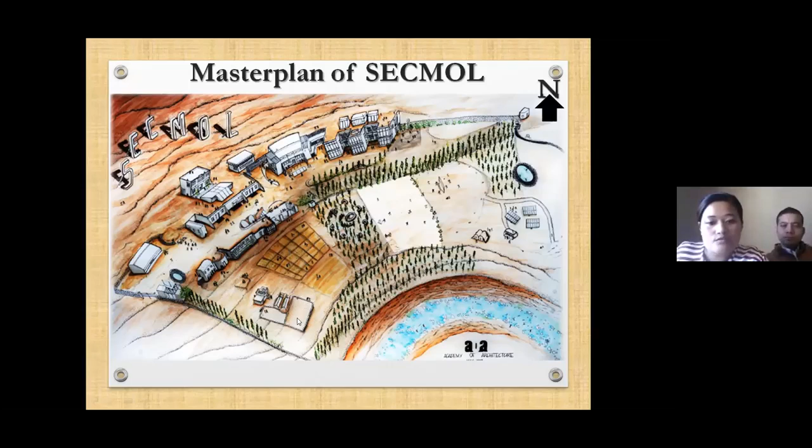These are the Timken Hall with big kitchen area, and these are some kind of organic farms, and these are the outdoor learning spaces surrounded with green areas, and these are the cow sheds and greenhouse for farming. So this is the southeast aerial view of the SECMOL, and this is the southwest aerial view of the SECMOL. Now let's move through each block in detail.

So this is the main block, Terra building, which is being constructed with rammed earth and passive solar technique. This building has won the Terra Award for Sustainable Architecture in 2016. Here we can see some modifications in Ladakhi architecture as per modern demand. For example, we can see this solarium space with provision of corner windows, which helps for maximum solar heat gain during daytime.

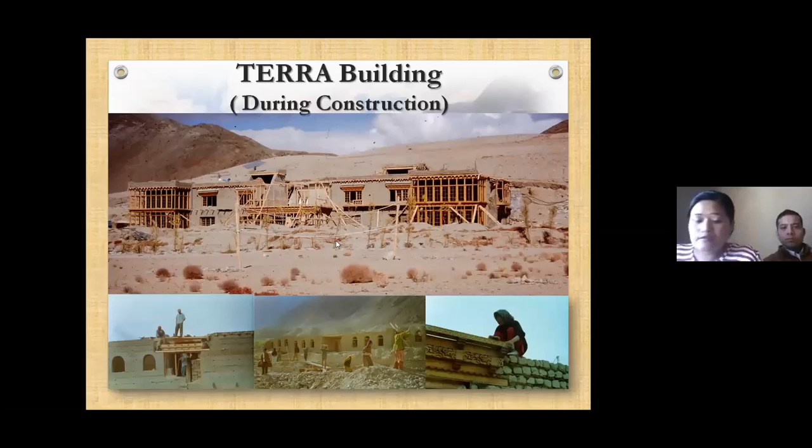So these are some images of the Terra building during construction. This is the typical floor plan of the Terra building. It is a two-story building, and its floor area is around 608 square meters. It constitutes learning areas like library, laboratory, technical workshop, communication room, assembly hall, and dormitory, etc.

Talking about the planning aspect, it is elongated from east to west with true south orientation. All the active activities are placed at the southern part of the building complex, and the occasionally used spaces are kept at the northern part of the building. Pockets of spaces are also provided here.

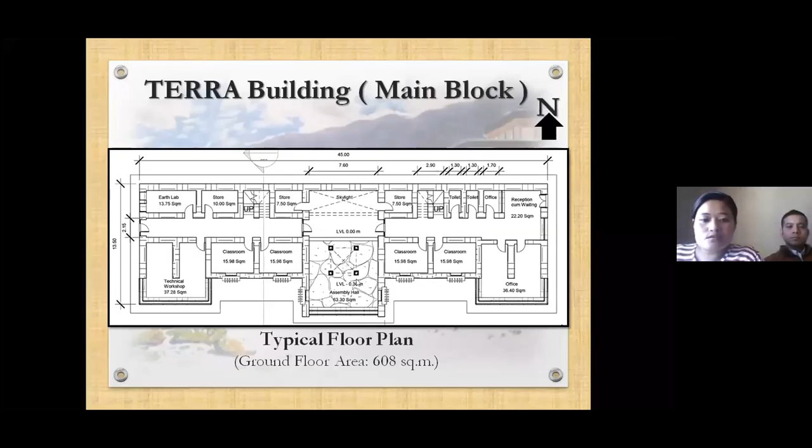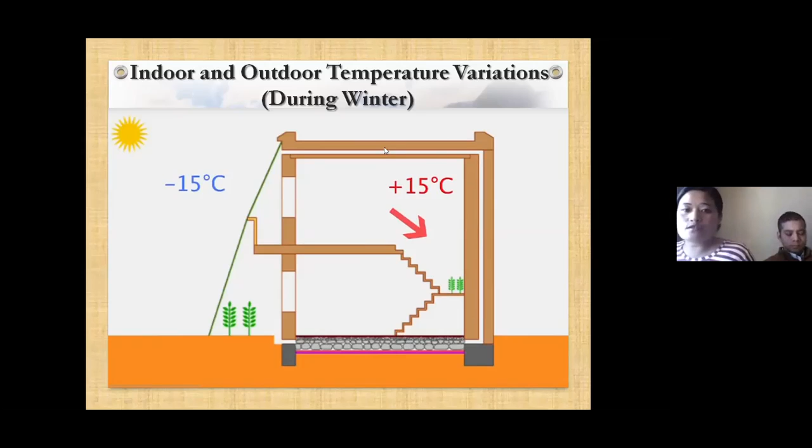It keeps the rooms warm even in the northern part of the building, because the stored heat is being released during the night time. Insulation is also provided in the northern wall and the roof system, so it prevents heat loss.

So this is the boys hostel, another significant building, constructed with adobe and stock clay blocks. This also follows the same vocabulary as the Terra building. This was completed in 2018.

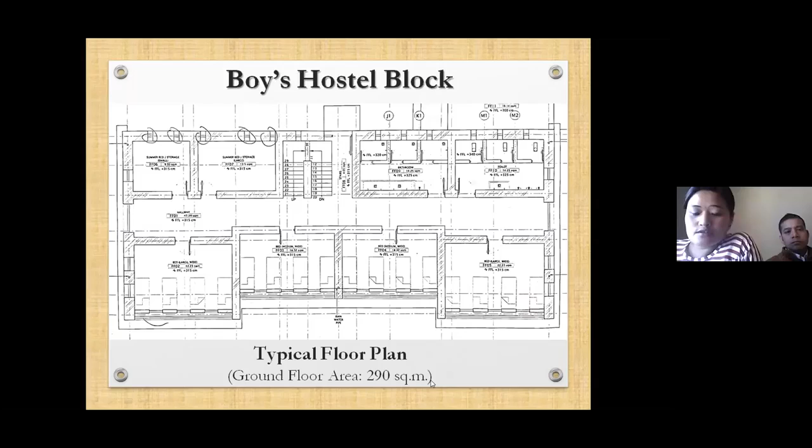The rooms on the south are heated through this Trombe wall, so these rooms are warmer compared to the Terra building. The Trombe wall is constructed with concrete blocks and water-filled bottles that act as good thermal mass. The wall is painted black from outside and covered with another layer of glass frame, so it traps solar radiation and generates hot air.

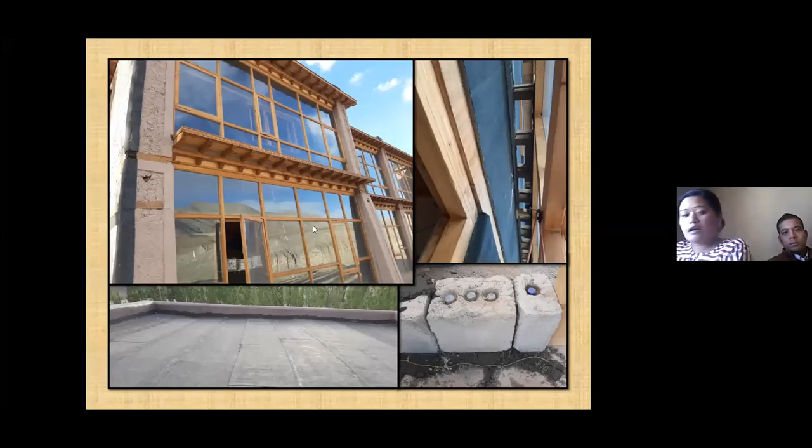This gap forms a continuous loop between these floors, which helps circulate the hot air between them. Also, the roof finishing is waterproof tar felt, which is a byproduct of petroleum refinement.

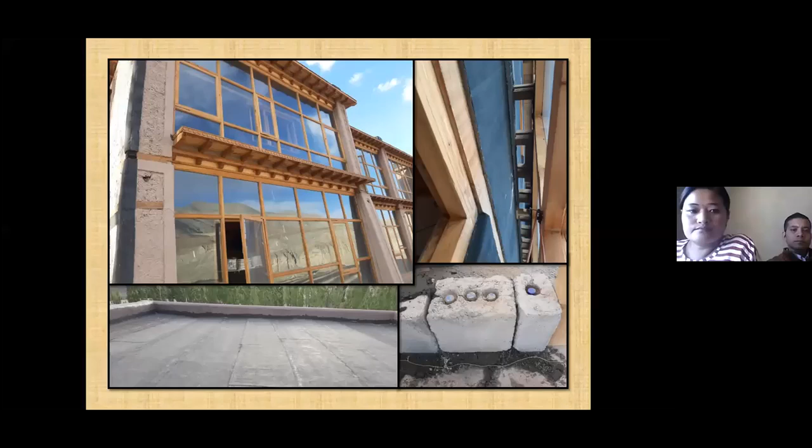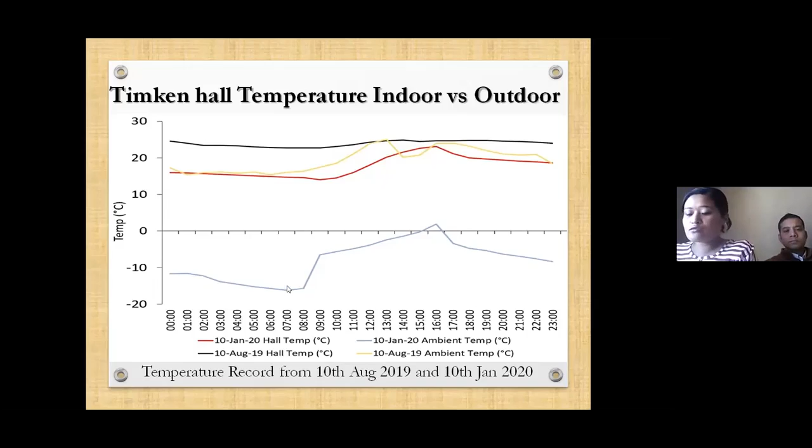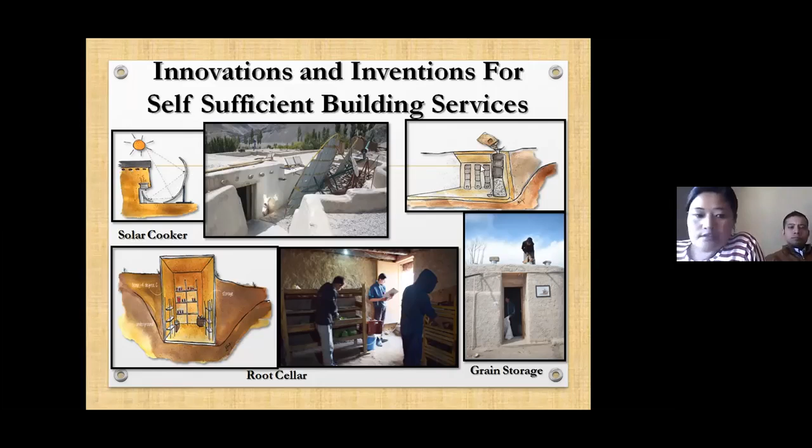During these pandemic situations of COVID-19, what we can learn is that we need to design buildings with self-sufficient building services, which we can see in SECMOL. For example, this is parabolic mirror solar cooking, and this is underground storage made up of waste metal drums. This is the root cellar for storage of vegetables.

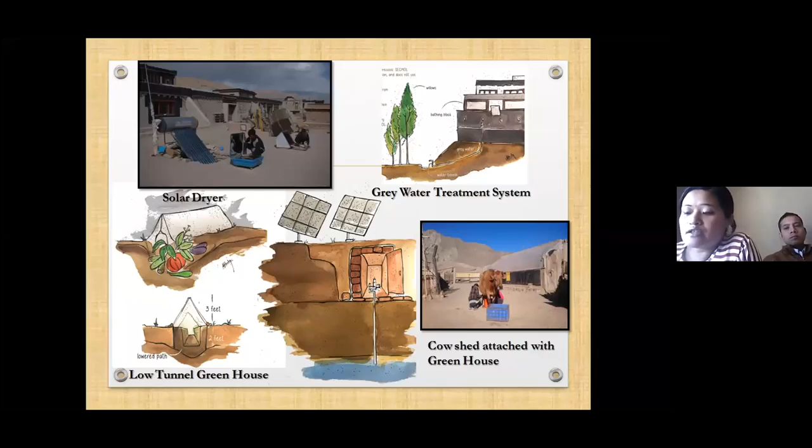There is also a solar dryer, solar water heaters, and a low tunnel greenhouse. There is a solar PV power system, which makes the whole complex independent and self-sufficient. Even the cows stay in a solar-heated cow shed attached with a greenhouse, which increases milk productivity.

There is also the good practice of using a Ladakhi dry or composting toilet. After one year, this is used as manure. Ladakh, being a cold region, has problems with the water supply system, so they cannot use wet toilets.

So this is one of the good practices, an eco-friendly Ladakhi composting toilet, forming some kind of intact nutrient cycle. This is part of an ecosystem.

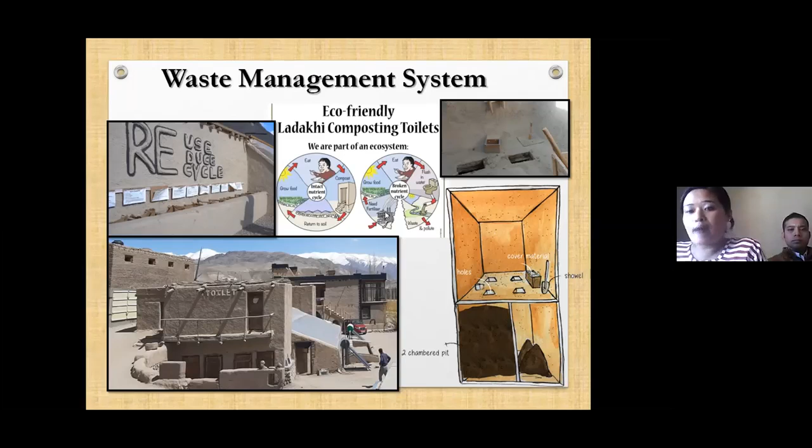For the automatic door clamp, I would like to share one video.

Can you see this screen right now? Yes, Architect Sujata, we can see the screen. Can you see this video screen? Yes, the video screen is being shown. Okay, nice.

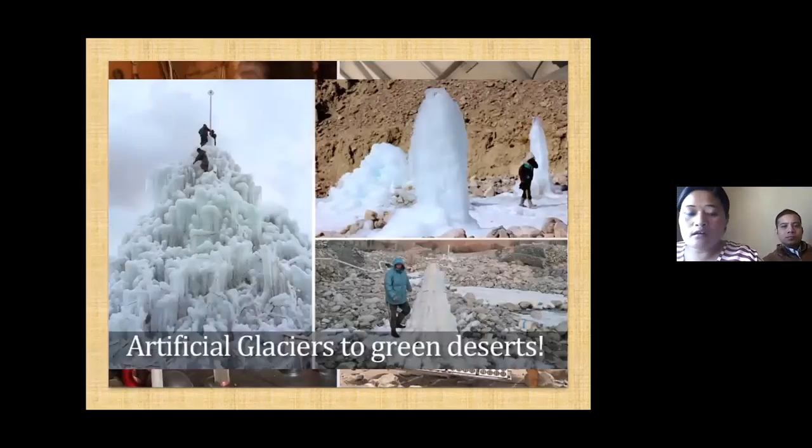Last but not least, I would like to conclude with the quote of our respected Professor Sudarshan Raj Tiwari: 'When God was creating the universe, there were some leftovers. Architects can only use such leftovers to create newer things.' Thank you.

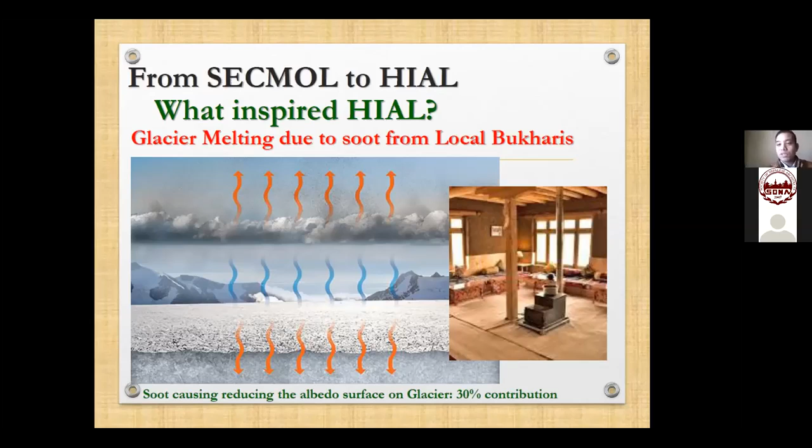Another climate crisis is the water crisis in Ladakh. Due to climate change, it triggered premature melting of glaciers, and the water falls as a flash flood, which is not usable. During the dry season, it is completely dry, and about 80% of Ladakhi agriculture is dependent on glacier water. This water is not available in time when the agriculture needs it. So the agricultural productivity has reduced to 50% due to this premature melting of glaciers and untimely distribution of water—water available when it is not necessary, and water not available when it is necessary.

And another ecological threat is due to rapid development and this introduction of concrete technology, as Sujata has previously shown.

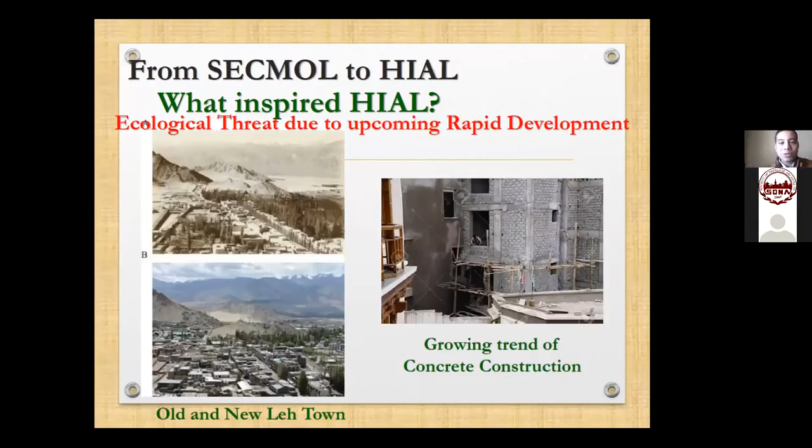The solution that the people devise is rampant copy from the industrial society, and even for the army cantonments, they copied designs from the Jammu state. Ladakh was a part of Jammu Kashmir state—all decisions were made from Jammu at that time. Now it has become a UT, and these buildings are very irrelevant to the climate of Ladakh. So these were all copied and irrelevant buildings—you can see these same buildings, and thousands of these cantonments are going to be built out of the same design, and there should be some interference.

So that is one driving force. Another driving force is the challenges in the education system. Like in SECMOL, for example, it was the challenges for the small children. Now for the challenges for the adult children, what Sonam Wangchuk sir has listed is mindless education, as you can hear in the news that there's a steep suicide rate in higher education. Like 30% of the suicide cases are due to inability of students to cope with the education system.

Then another challenge is the need of retraining of the manpower. As he usually says, you have a very arrogant, ill-equipped graduate pass out who goes into the industry, knows nothing, who has to be retrained. And another is manpower nourishing the brown industry—as you can see from all the engineering, management, and science, these are all designed in order to nourish the industry, to serve the industry. And these industries are all brown. So we have to prepare manpower who can nourish, who can flourish the green industry.

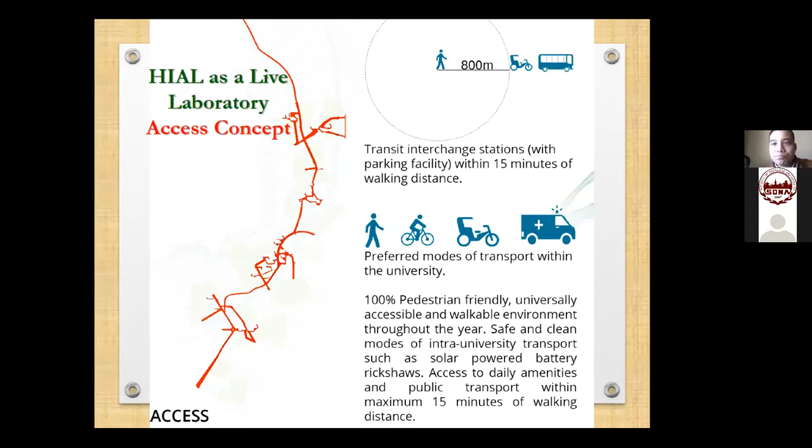Talking about the landscape, each and every portion of the university that we have planned is like productive landscape. If you see the whole movement of sustainability, for example, energy efficient building design, then green architecture, then sustainable architecture - if you see each of them, it is a bit different and more responsive towards the ecology.

Beyond sustainable design, there is what we call regenerative design, in which we contribute - we not only prevent the negative impact, but in fact we contribute to the ecology itself. And if you see the greeneries in Ladakh itself, none of this was produced by nature. These were all cultivated by humans and inspired by that culture. Inspired by endurance, we can make the whole landscape of our university very productive.

In that sense, we are promoting agriculture, silviculture and orchards for 30%, vegetable farming and organic farming for 40%, kitchen gardens and roof gardens for 30%. We have a hierarchy of this farming - for example, a small vegetable garden within a building complex, then in a neighborhood a greenhouse, and at the scale of the university, apple orchards and different indigenous food orchards. Through this hierarchy we have a whole sequence and collection of productive landscape.

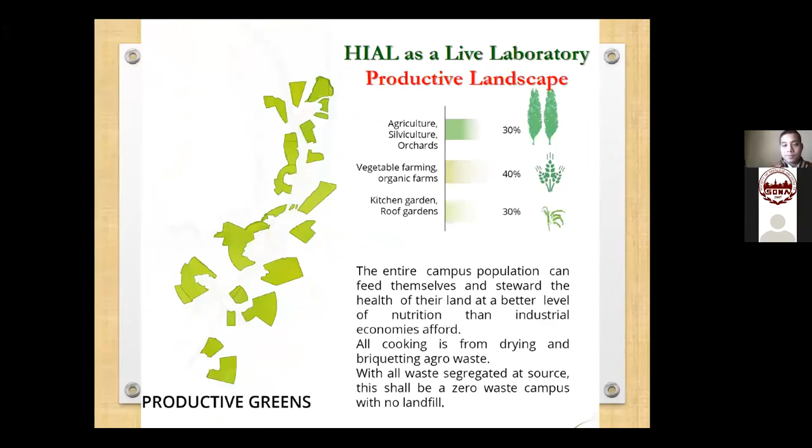And the norms that the university is to follow, the design guidelines that the university is to follow, are also the design guidelines for this village.

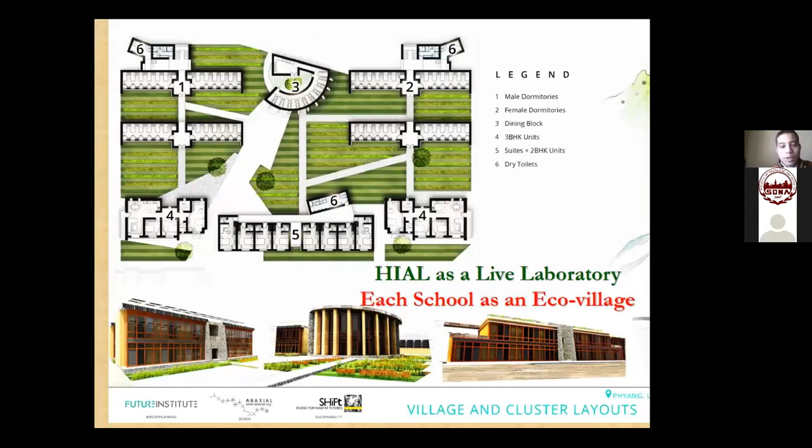This is one typical conceptual plan of the cluster, a village cluster in the form of a school. As the concept shows, the buildings are south-oriented, there is an interaction central hub in each cluster, and there is connectivity for interaction. All the intermediate lands are provided with neighborhood farming for growing vegetables and small to medium sized fruits.

These are the guidelines that have been prepared for the university as well as for the nearby settlements. Because HIAL is a university in which architects from different countries keep coming, doing things and going, there should be proper guidelines so that there is consistency in the formation of the master plan. So the workshop finally decided to form these guidelines.

So these are the guidelines for the master plan: productive landscape, ice stupas and reservoirs as a source of water, sun as the source of energy, waste management through dry composting toilets and segregation as inherited from the system of the SECMOL, and universal accessibility using pedestrian mechanisms and low power vehicles.

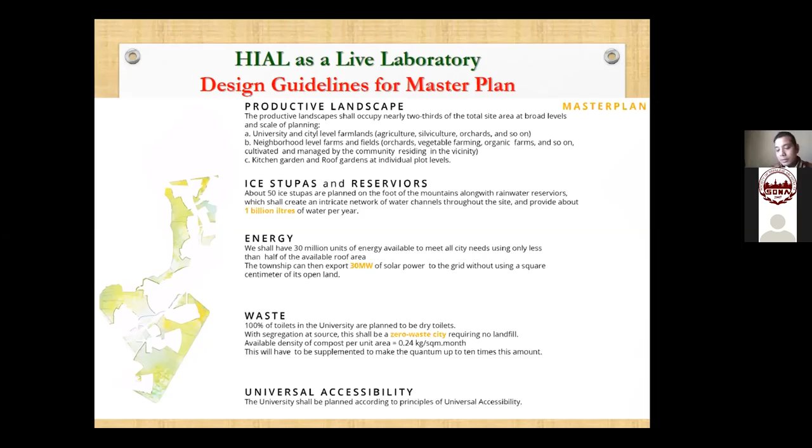These are the same - we have mobility at the cluster level, and we respect the principle of water conservation. The buildings should be oriented towards the south, and the distance between buildings should be maintained so that everyone is assured of the solar right.

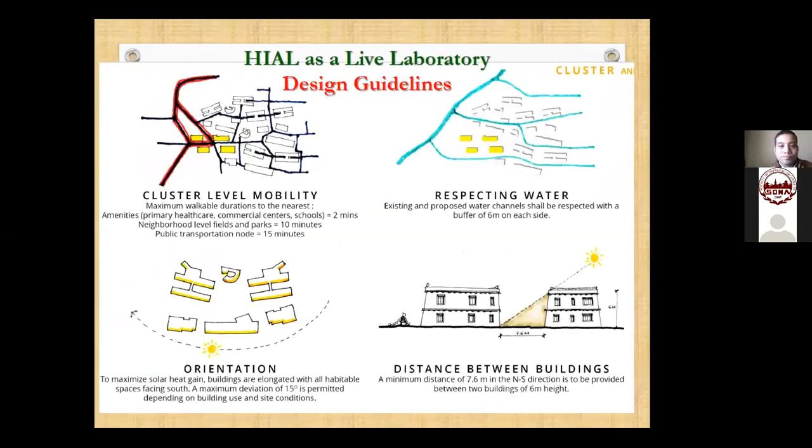Another thing requested is the design vocabulary for the complete project that we should follow. For example, we respect the traditional Ladakhi culture, so we have certain vocabularies.

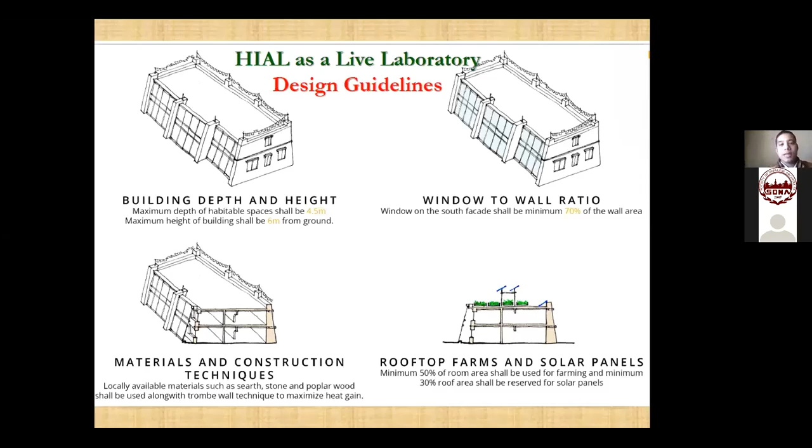In addition to the traditional vocabularies, as you can see in this picture, we have all the south-facing walls with glazing. These are trombe walls. Ladakh doesn't have the culture of trombe walls, but we can finely integrate this modern need for solar heating with the traditional Ladakhi culture. These are some of the sketches as design guidelines.

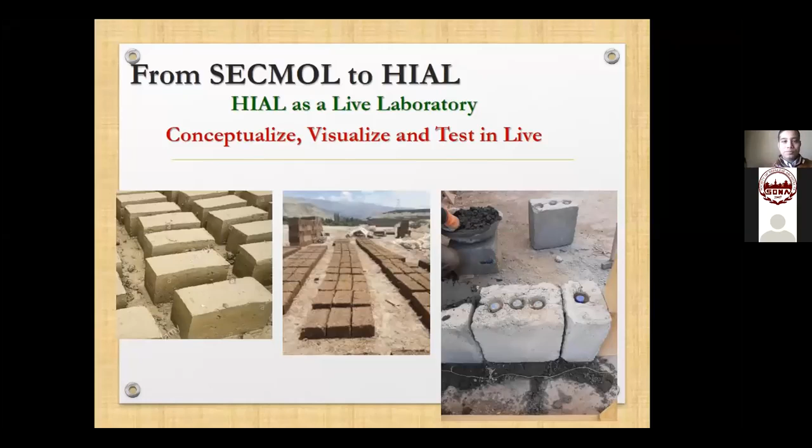We're improvising the thermal mass system to maximize heat storage so it can be stored during a series of cloudy days. Our approach is to conceptualize, then visualize, and test live. These are some test buildings that we are doing.

We have two approaches: one is crafting the building for architectural expression, and another is for the public and market demand. Because earth building demand is slowly being introduced in Ladakh, we need to be careful to make it handy, practical, and accessible to the public.

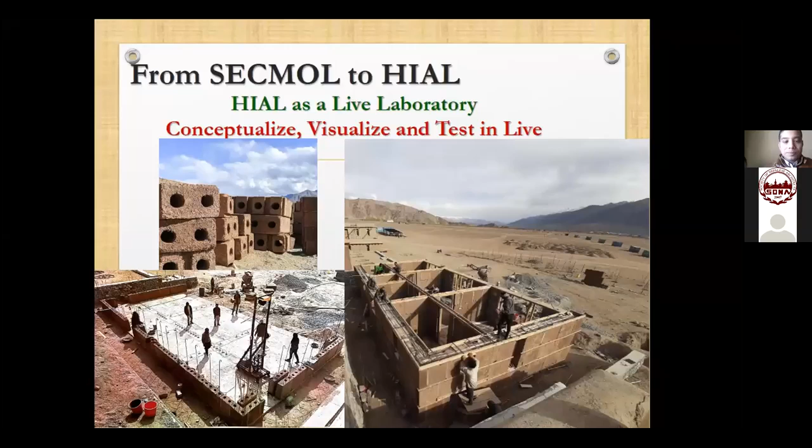So these are some experiments for that, and we have set up a few buildings. Right now we have 5 staff quarters as test buildings with the same footprint but different technology - rammed earth technology, straw clay technology, Adobe technology, straw clay prefab technology, and RCC technology.

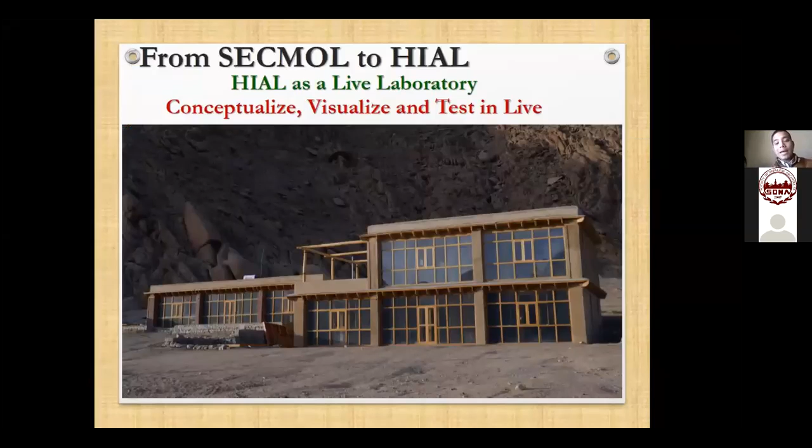These are some pictures inside. We haven't gotten as elaborate as SECMOL - we are still in a budding stage.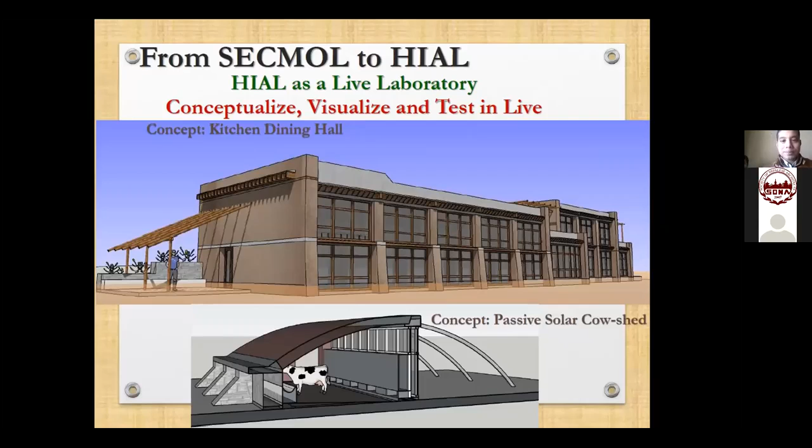Our approach is like, for example, government people, like armies, ITBPs, they come to visit because they have a large demand for housing for them. And we have to convince them that the building models we are designing are very good. We make them sit in our room in the cold winters and let them experience how warm it is, and they finally get convinced.

One of the activities of our university, apart from building the university through construction, is academics side by side, and we disseminate what we have learned. This is all through the concept of do, reflect, and redo. The curriculum of our university is 60 to 70% hands-on. You go into the field, you touch the soil, you experience it, you test it, you break it, you feel it, and then you internalize it and educate. You get educated in that way, and then you relate it to the theory. This is the way.

We have courses where almost all the students are architects and engineers who come here to pursue a certificate course or fellowship course. We involve them in live projects. We don't just give them theories or little experiments, we allow them to do actual projects. This is part of, and this is the beauty of, the HIAL system.

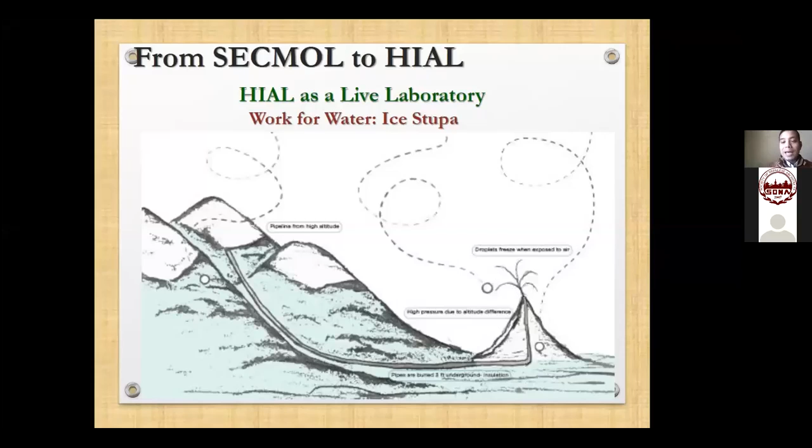In terms of globality, it has a local impact in managing water shortage, and a global impact in managing glacier outbursts, because you siphon water from below and reduce the water level so that the chance of glacier bursting is minimized. On a large scale, it can be a solution for the melting of the whole glacier.

And of course it has large implications in greening the desert - you collect the water and green the desert. One of the ambitions of HIAL is that, even though it is a very isolated desert, one day we'll be making it all green using ice stupas.

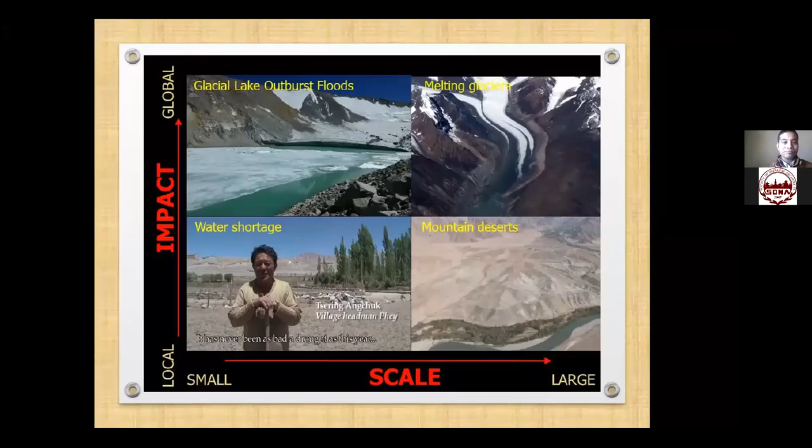Another thing I want to add is that the activities of HIAL University are not limited to the premises of the university itself. In fact, we don't want to limit ourselves within the university - we want to go out more. For example, the Department of Tourism has supported lots of farm stays, and this learning-by-doing culture has encouraged many fellows to set up their own business in farm stay, or at least support and manage existing farm stays. And HIAL wants that.

Now what is next? Why are we sharing all this? For example, I belong to Nepal, Surata belongs to Nepal, and we are here in Ladakh working so hard. But the thing is, it's not that we are working just in Ladakh - we are working for the Trans-Himalayans. For example, ICIMOD is working for the whole mountain region from Kathmandu. So what we believe is that HIAL is a connecting land ground for the Trans-Himalayan region, connecting Nepal, India, Bhutan, Pakistan, and Afghanistan.

This idea of making a learning center for sustainable living in the Trans-Himalayas has some seed in Nepal also. I'm very proud to say that when Mr. Sonam Wangchuk visited Nepal as an education advisor on behalf of MS Denmark, MS Nepal Action Aid Denmark, we used to have lots of discussion about making an eco-literacy center for the Himalayas in a place neutral to all. We discussed that Nepal could be that place because we are geo-strategically located but don't have animosity with other countries - Nepal can be a good hub for Afghanistan, Pakistan, India, Bhutan. But it didn't happen - we formed one small NGO, but it didn't sustain much. Still, the idea of forming this eco-literacy center representing the whole mountain region has its origin in Nepal itself.